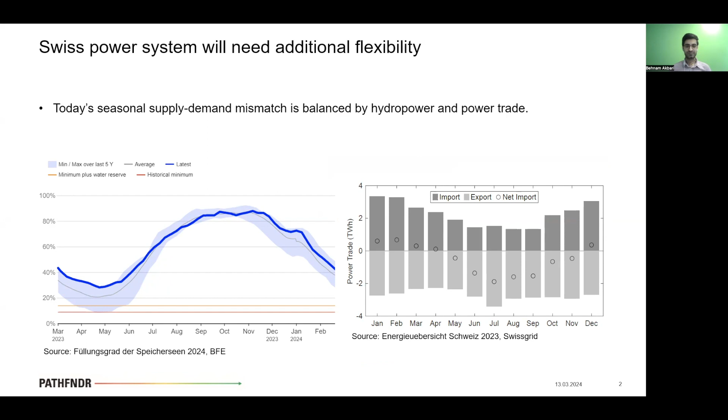But in the future, this seasonality will even increase. We have the electrification of heating and mobility, which increase the demand in winter. At the same time, we have the nuclear phase out and increasing penetration of PV, which increases the need for flexibility across time scales.

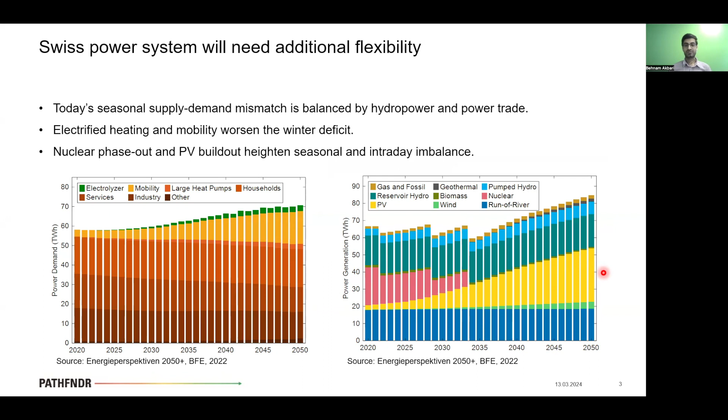So there are various flexible resources that Switzerland can use to meet this increasing flexibility demand. The first one is storage. Although reservoir storage is almost already depleted in Switzerland, there is potential for fuel storage and also batteries.

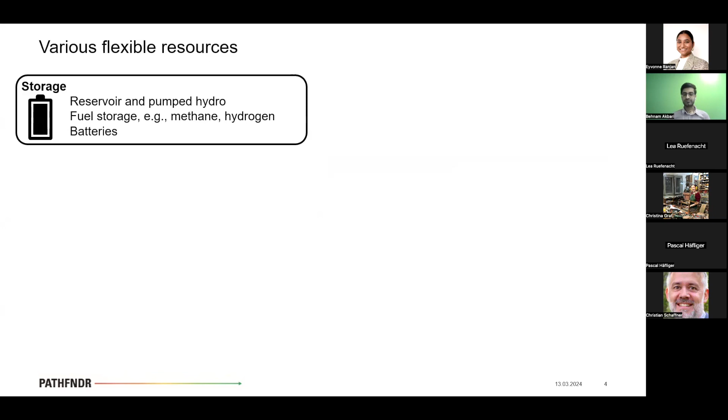The next flexibility option regards renewables like alpine PV and wind, which have a very good generation portfolio in winter. We have the option of sector flexibility or sector coupling, where we mainly look at power generation from gaseous fuels and also power to gas. Sector coupling in general is crucial to meet the emission targets by decarbonizing mobility and heating.

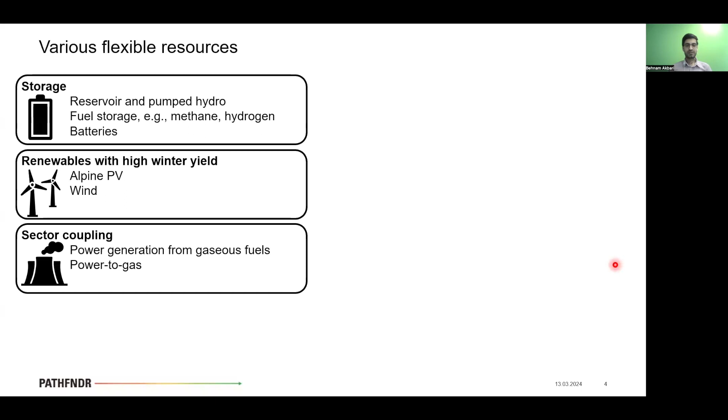In addition to these supply flexibilities, we can have flexibility from the demand side across various timescales. So demand shifting of electric mobility and heating, for example, can provide intraday flexibility, and the elasticity of fuel consumption can provide flexibility in longer horizons.

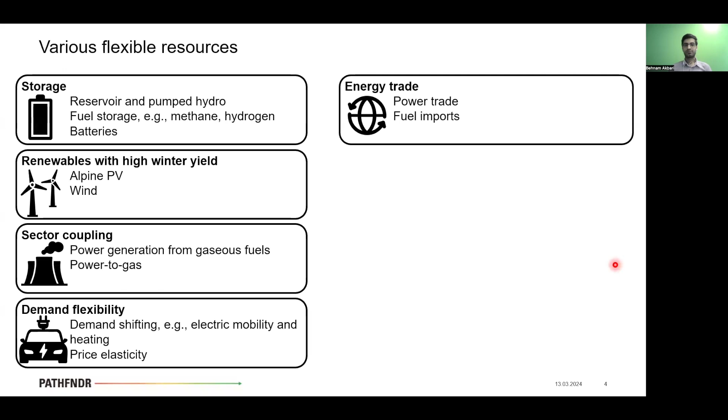The part of flexibility that is not met domestically can be compensated by energy trades. So we have power trade and fuel import options, but these are involved with socio-political and also technical uncertainties.

So this motivates our study, and specifically given these variety of flexibility options, what is a cost-effective portfolio to meet the needs for flexibility across timescales? And also considering the uncertainty of energy trade, what infrastructure investments should we make to secure the energy supply under limited power trades or fuel embargoes?

So this leads to the objective of this research, where we examine the flexibility provision across intraday to seasonal timescales in the sector-coupled energy system of Switzerland under various energy trade scenarios. So we conducted this research in PATHFNDR Work Package 1, in a fruitful collaboration between RRE and the Energy Science Center.

And we promoted the state of the art in the literature by employing a high spatial temporal resolution and also a thorough flexibility representation.

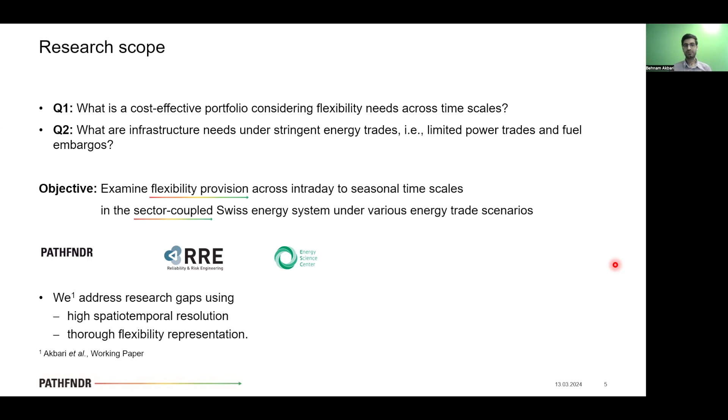Okay, so I'll continue this presentation with an overview of the methodology and split the results in 3 sections, and finally conclude with some takeaways.

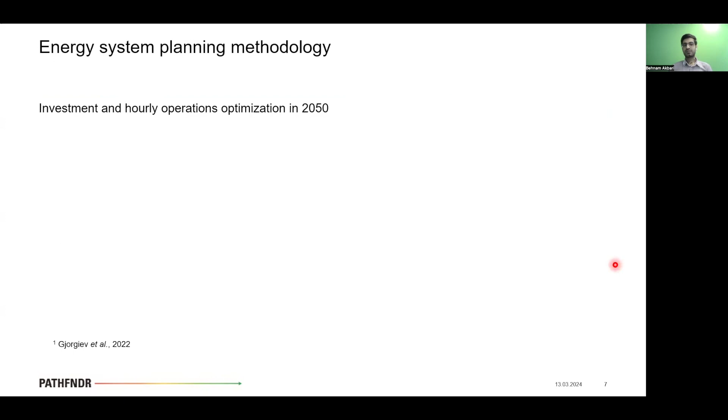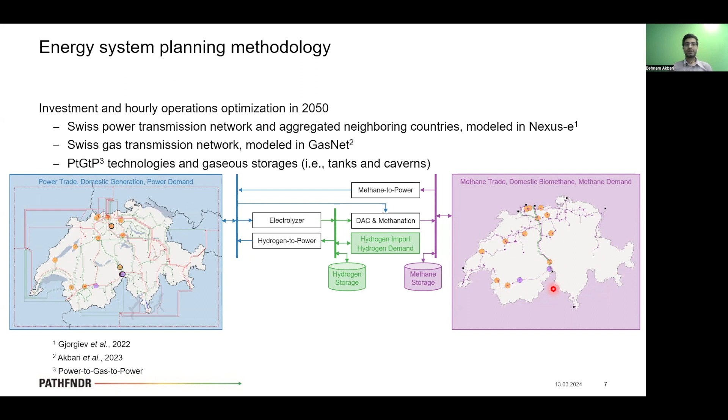So we have the seasonality on both the generation side and demand side, and these seasonalities are contrasting, meaning that we have higher generation in summer and higher demand in winter.

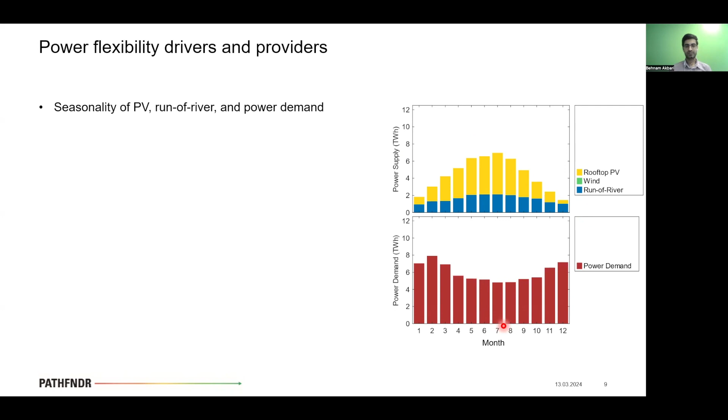And several generation technologies can contribute to the winter supply mostly. These include reservoir hydro, alpine PV, biomass, and methane to power, I mean gas-fired power plants.

And on the demand side, we see a relatively large contribution by pumped hydro and electrolyzer absorbing the excess renewable energy in summer. On top of that, we have the demand flexibility, which provides intraday shifting throughout the year. And what is remaining is compensated with net imports in winter and net exports in summer.

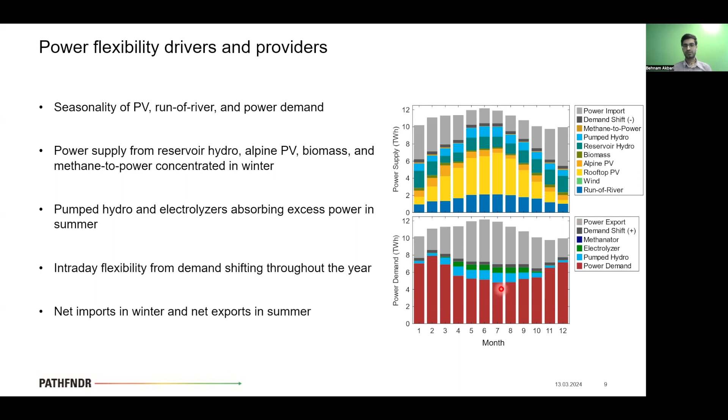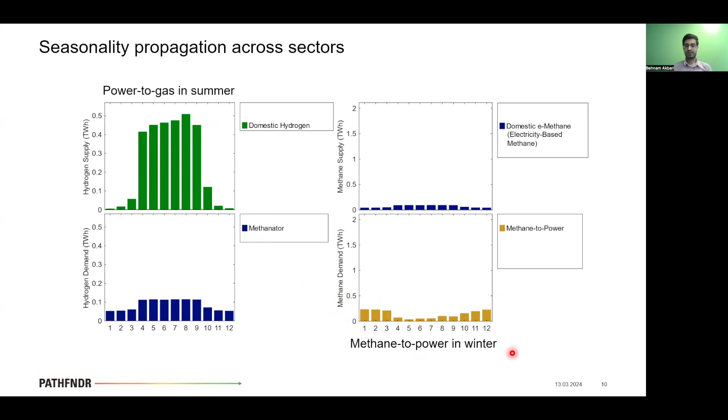So if we look at the gas side of things, we see that the seasonality in the power sector propagates. So we have the power to gas mainly happening in summer and methane to power mainly happening in winter. This adds to the already seasonal methane demand, and we end up with a highly seasonal total methane demand.

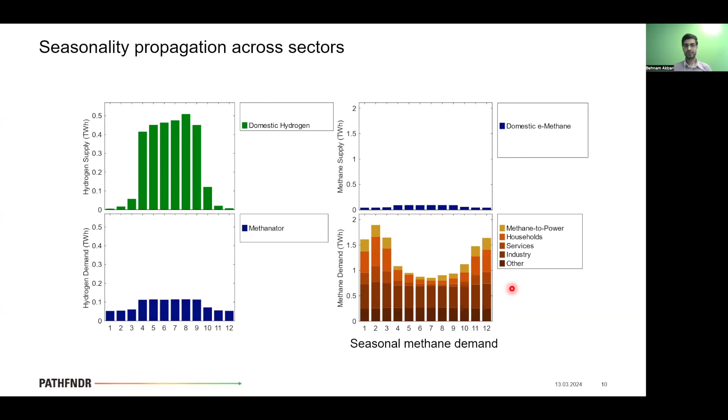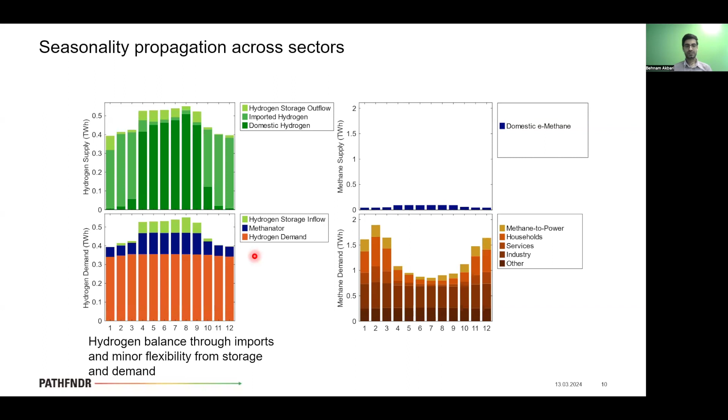So to address this seasonality on the hydrogen side, we mostly rely on imports, and to a lesser extent, we deploy hydrogen storages and utilize the demand flexibility.

And on the methane side, similarly, we see that the domestic biomethane is providing seasonal flexibility. This is augmented by flexibility from fossil methane imports, you see in red, and also a relatively large amount of methane storage.

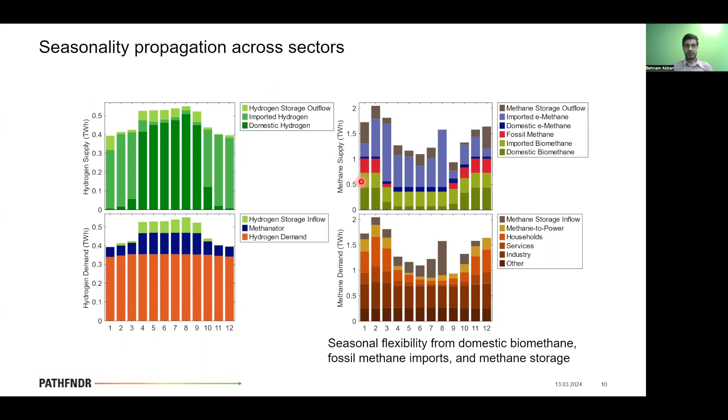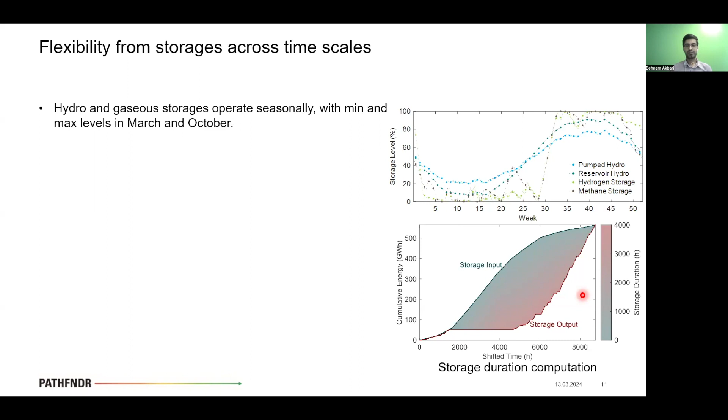With this, we can compute a storage curve like this, and we can understand where each storage technology is providing flexibility. In the case of pumped hydro and hydrogen storage, the average duration is around a month, mainly driven by variable renewable generation fluctuating along different timescales, especially multi-day. If we look at reservoir hydro, the storage durations are around 2 months, mainly driven by power demand fluctuations.

Methane storage boasts the longest duration. Fluctuations of methane demand and e-methane prices are the driving factor for this long storage duration.

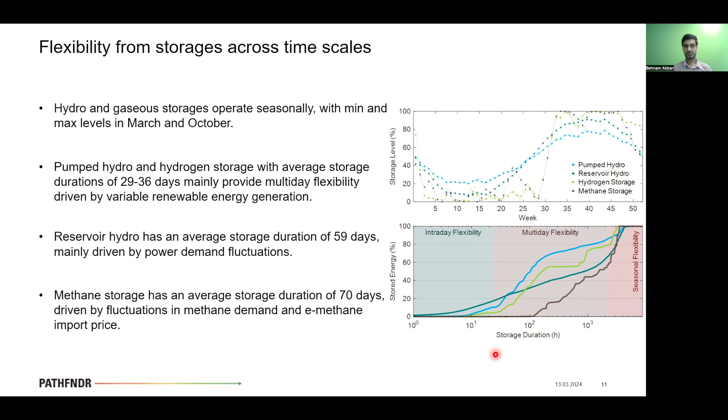Okay, now let's explore how investments and operations change if we limit the energy trades. We look at 4 scenarios. We start with the status quo, which is 2020, and we don't allow any new investments in this scenario. The next scenario is the base scenario, where we have the normal NTC and reference fuel prices, and we allow investments into tanks and caverns along other technologies.

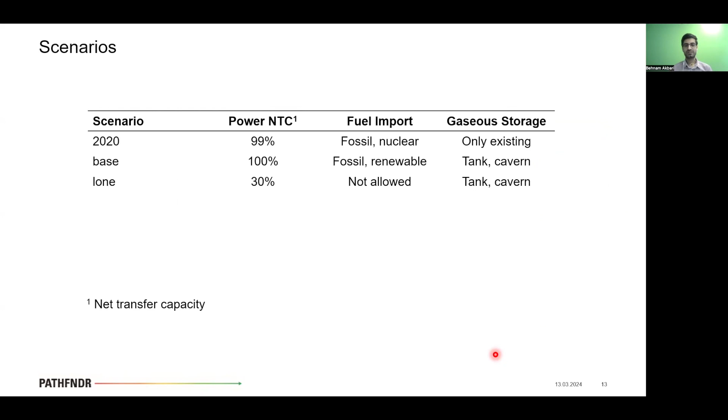The lone scenario corresponds to the energy market integration dimension in cross scenarios, where we limit the power NTC to 30% of the normal value, and we do not allow any fuel imports. In addition, we introduce a variant which we call without LRC. In this scenario, the only difference is that we don't allow investment into lined rock caverns, to see the impact if they don't prove physically or technically feasible in Switzerland.

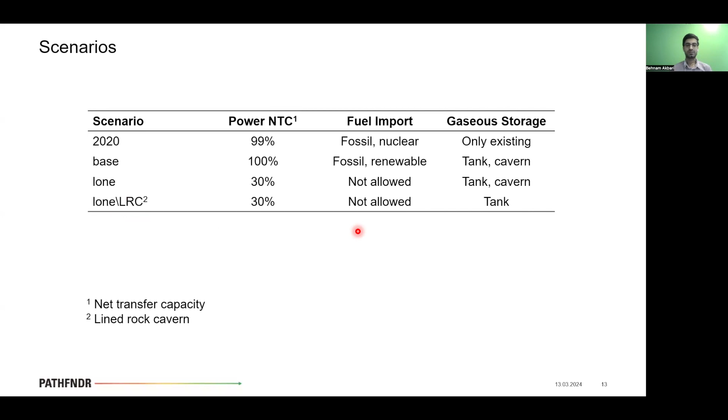Okay, let's focus on the power sector results first. We see that there is a need for a high expansion of renewable energy capacity in Switzerland, along all the scenarios for 2050. But this is more drastic in the scenarios where we don't allow as much as we want of energy trades. In these lone scenarios, where we don't allow power imports and also fuel imports as much as we want, we see higher renewable deployment, especially wind.

But this higher renewable installation under limited energy trades leads to higher curtailment of renewable energy. The important thing to notice here is that in these lone scenarios, we don't invest in power generation from gaseous fuels, be it methane to power or hydrogen to power. This suggests that domestically produced fuels are not viable for power generation—they are too costly for this purpose.

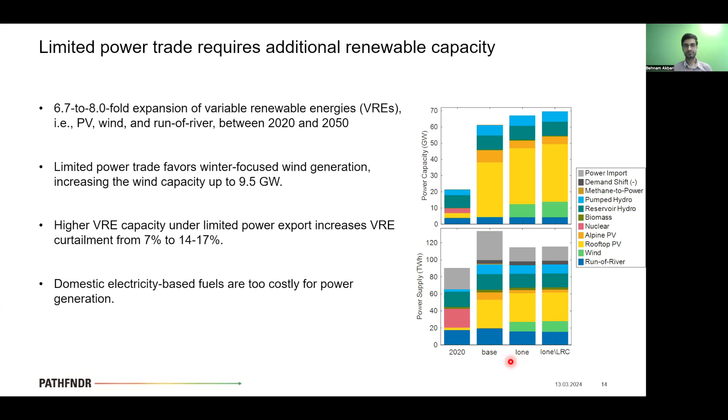Now looking at the gas side of results, we see an emerging hydrogen demand in 2050. In the base scenario, it is supplied by a combination of domestic resources and imports. But if we don't allow imports, we tend to produce as much as we can from domestic resources. Especially electrolyzers can realize this using the excess power in summer that cannot be exported, to produce fuels that are used domestically.

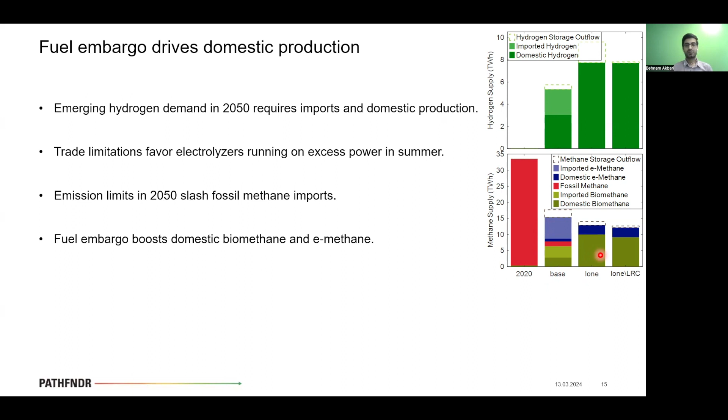If you look at the methane supply, the first thing we notice is the drastic reduction in fossil methane imports, driven by the emission limits. The next thing we notice is the shift from imports to domestic resources like biomethane and e-methane—that is, electricity-based methane—when we do not allow fuel imports.

And if we look at the storage sizes, we see that up to 1.7 terawatt hours of cavern storage would be used to ensure winter supply in the year 2050. But if we exclude caverns, we end up with only 0.2 terawatt hours. This implies that tank storages are not economically viable for large-scale storage of gas or hydrogen.

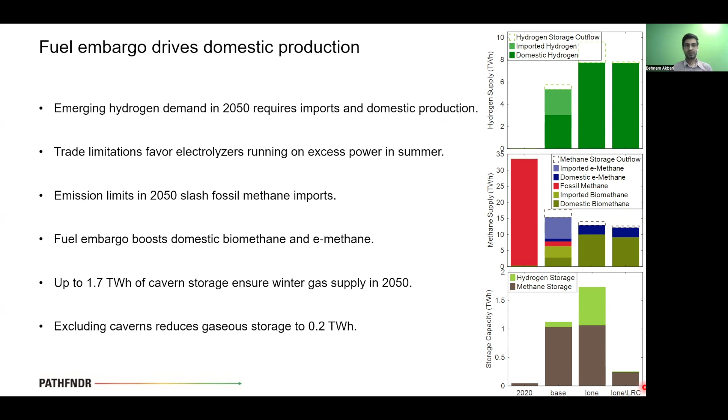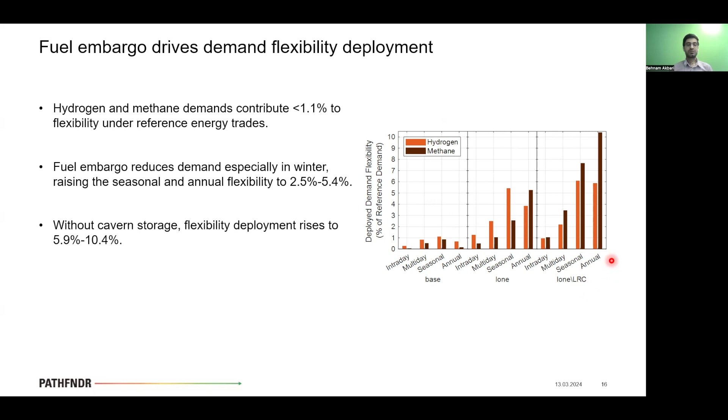So this concludes this section of the results.

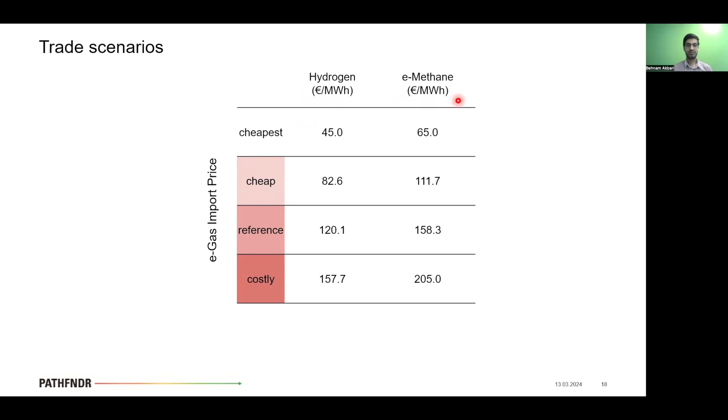Now that we have seen that import conditions influence the results very much, we want to do a more extensive analysis of a broader set of trade scenarios. Specifically, we look at the role of hydrogen and methane technologies across these scenarios. We start with 4 prices defined for importing hydrogen and e-methane, combined with different levels of net transfer capacity, resulting in 16 scenarios. The base scenario has reference import prices and an NTC of 100%.

So let's dive into the results. Let's focus on the conversion technologies between power and methane and hydrogen at first.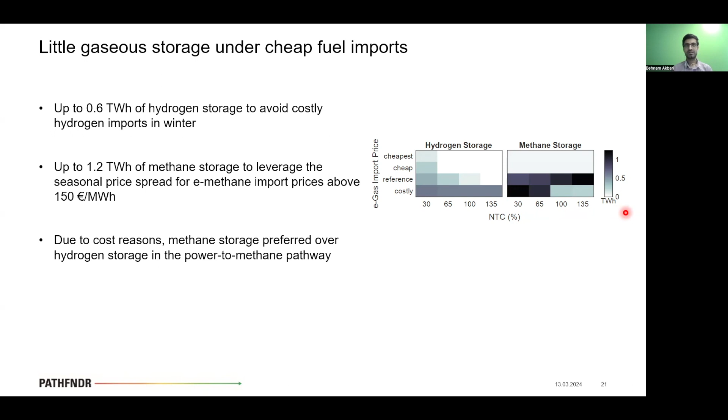It's important to note that when there is a trade-off between the two storage types, like when we go through the power to methane pathway, we tend to use methane storage. So we store the final methane rather than the intermediate hydrogen, simply because methane storage is less expensive.

Now that we have looked at the results with some depth, I want to derive some conclusions and share insights with you. We have compared our results with the literature and relevant studies in Switzerland to make them more robust. At the same time, I will present quantities from our main scenarios so we have a better understanding of where we stand.

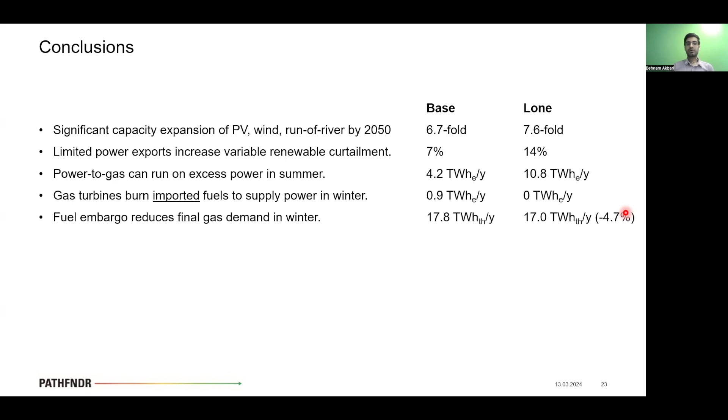We see that fuel embargo reduces final gas demand by something like 5% in winter. Fuel embargo additionally results in higher installation of gaseous storages, as we can compare the two scenarios, and at the same time increases the storage durations, meaning more seasonal operation of storages.

Regarding the spatial results of our models, because it's a strength of our models, we find that where we can install caverns plays a crucial role in where we can install storages and power to gas. Additionally, power network constraints and net transfer capacities play an influential role on the placement of power generation, power to gas technologies, and where we expand the power network.

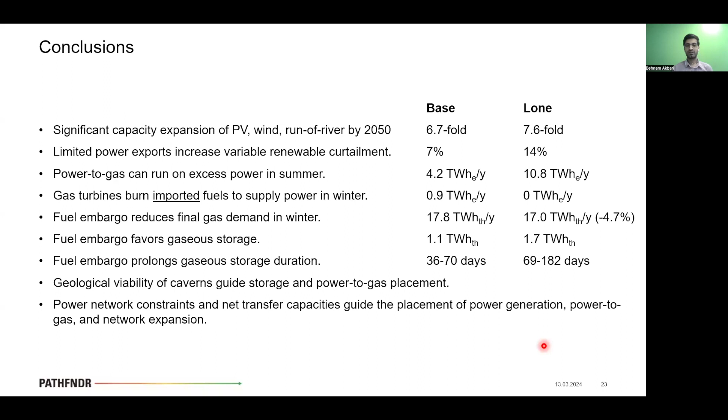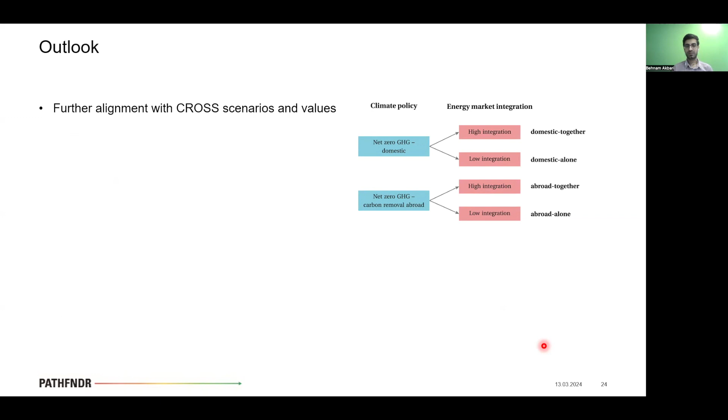Looking ahead, we envisage 3 directions to follow this research. First, we want to align with CROSS scenarios as much as we can. Second, we want to use Euro-Calliope, a European energy system model, to obtain boundary conditions which we currently derive from exogenous sources. Finally, we want to identify the impactful parameters so we can conduct further sensitivity analysis.